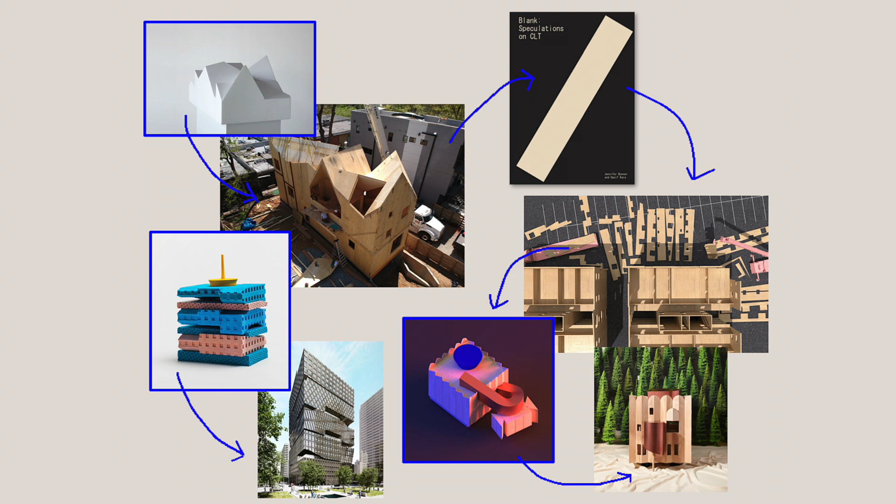I'm going to speak about mass timber construction, including Haus Gables, a single-family residence in Atlanta, Georgia, from 2018. I'll introduce the Blank Book. I'll also show pitches to developers for a multifamily housing project, a small lot urbanism project, and a spec office tower, and I'm going to end with the Blank House. But all of this is also just really about candy, sandwiches, and hats.

Before I get to that work, I want to introduce the work of Mall through a series of images. I'm often interested in starting architecture with a question rather than a sketch.

Here we are flying four drones around Haus Lange and Haus Esters to scan Mies van der Rohe's use of brick in these large picture windows, located in Krefeld, Germany. We had two drones flying around scanning the rear back facades, in synchronization—these are kind of two twin-like houses. But two drones weren't enough, and we needed four in order to film the two drones doing the synchronization.

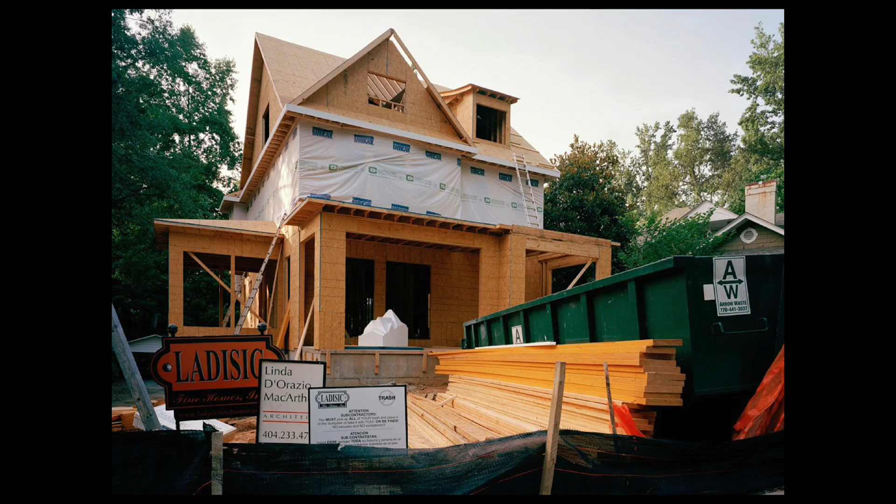So performance is very much a part of the mall recipe. We often look to things outside the discipline of architecture, found in pop culture, like sandwiches, picnics, candy, candy shops, and dollhouses. I'm interested in the ordinary, like astroturf and stucco, and the everyday, like wedding photography or everyday construction techniques, and how all this material can become the starting point for the architectural project.

Mall is also interested in the project of representation, which I would argue is the only realm for the architect until she builds. It's the driving influence in all the work, and so for me, a representational project is the architectural project.

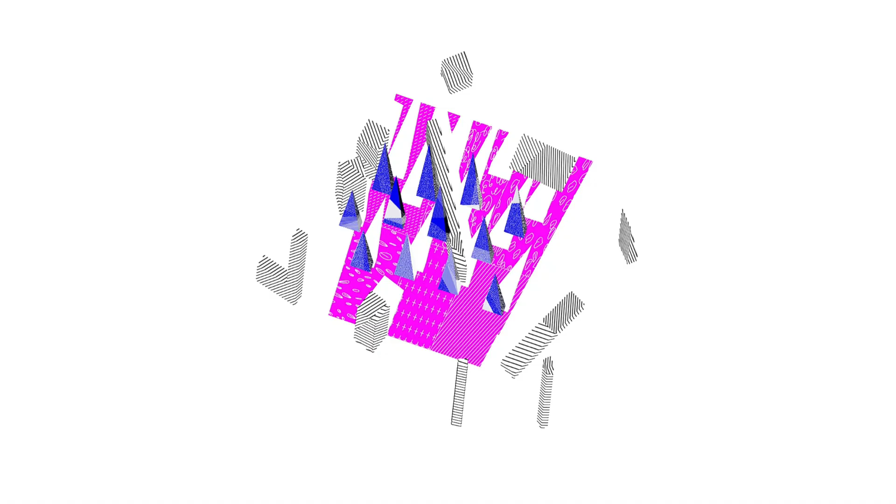This is a project called Another Axon that snaps into view and looks like an axonometric drawing. But it can only be seen within the city from the top floor of a Hard Rock Cafe parking deck in Boston, located on the Rose Kennedy Greenway.

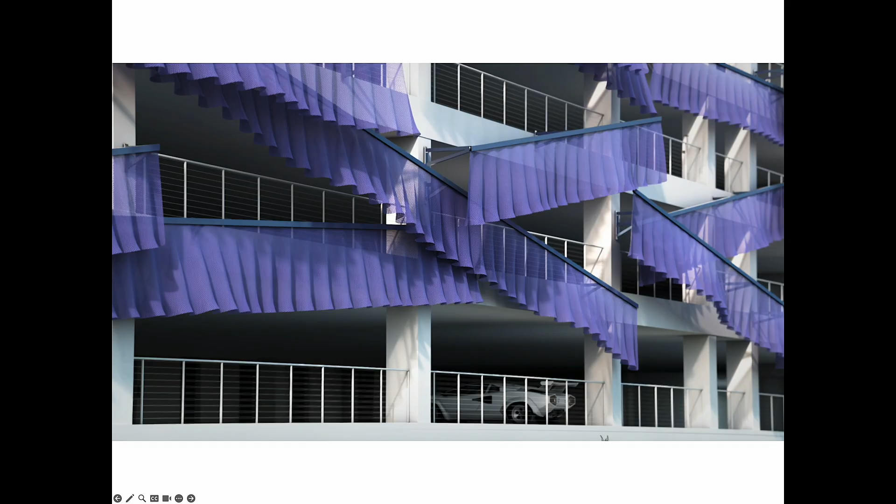So we have an affinity for fake, artificial materials, and the kinds of materials that look like one thing but are meant to represent another thing.

There's also an intentional link to art practice and the works of contemporary artists such as Barbara Kasten. Kasten's use of colored gel photography inspired a project titled Still Life, which became the driving force for an exhibition and publication at Harvard Graduate School of Design.

In my first year of teaching, I was tasked with being a faculty editor of a 400-page book, which ultimately became a demonstration project back to the school, asking students and faculty how they might start to use more color in their work.

Other artists like Mary Corse's white light paintings, where she painted with highway reflective glass beads for works inside the gallery—this became the mall's cladding system for a 55-foot-long glowing brick facade in Atlanta.

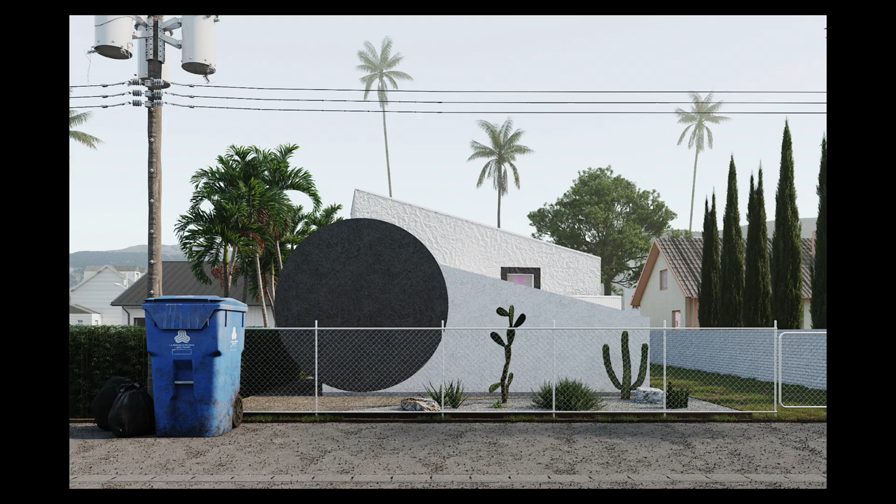The work is admittedly graphic, and it uses techniques of redaction similar to John Baldessari's big circle dot, seen here, in two accessory dwelling units for the City of Los Angeles' standard plan program.

So Lean-to ADU and Big Circle ADU reference all-American lean-to sheds, while also reinterpreting two Los Angeles architectural mainstays: the stucco box and the exaggerated false front.

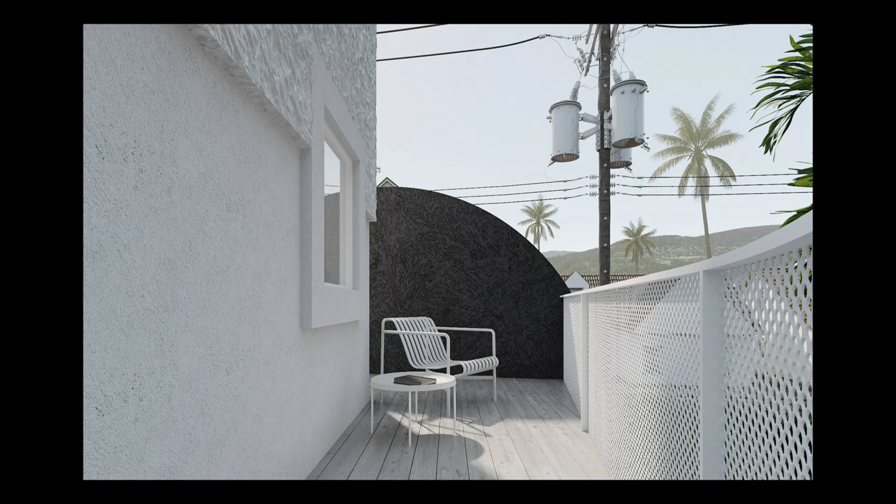We draw from bungalows, constantly mixing the low and high, such as the white house, black trim trend that we see in pop culture.

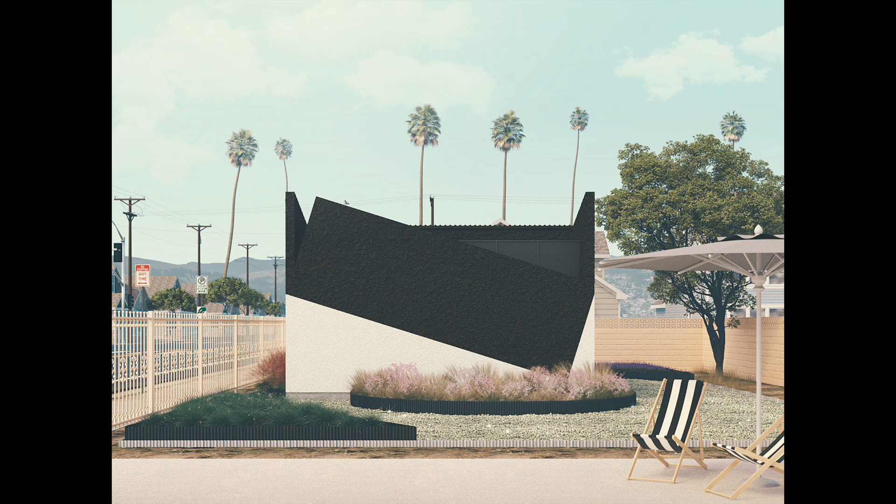There are two distinct ways that color appears in my work. First, through the use of color blocking, so materials of color kind of block inside of space. Second, through color gradients, so equal doses of pink and blue syrupy colors.

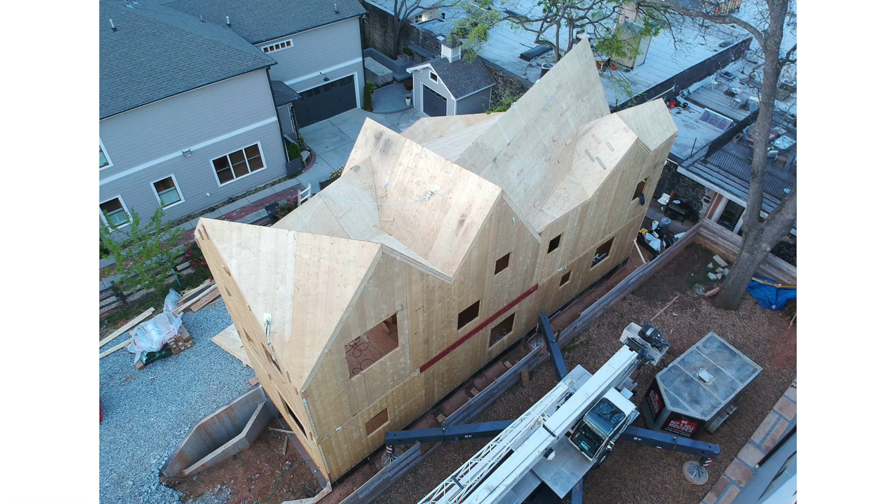Lastly, I'm drawn to innovative material systems like cross-laminated timber and its potential to reset the discipline of architecture. I'm going to demonstrate how CLT and its capacity for structural gymnastics can have implications on the aesthetic for domestic and public interiors.

The first project, Best Sandwiches, looks at something like a sub-sandwich, and the obsession in pop culture where everyone's vying for the best sandwich. We know this is kind of an American phenomenon. I'm interested in all three versions: the real Dagwood sandwich from a Google search, Claes Oldenburg's giant BLT soft sculpture made of vinyl, and our very own BLT at the mall.

I'm interested in figuring out a project between all three of these spaces. The project questions the extruded floor plate in architecture and looks to stacking strategies that sandwiches offer the discipline. It takes a certain amount of sandwich know-how to make an architectural stack. You can see bread, cheese, lettuce, tomato. This is a BLT.

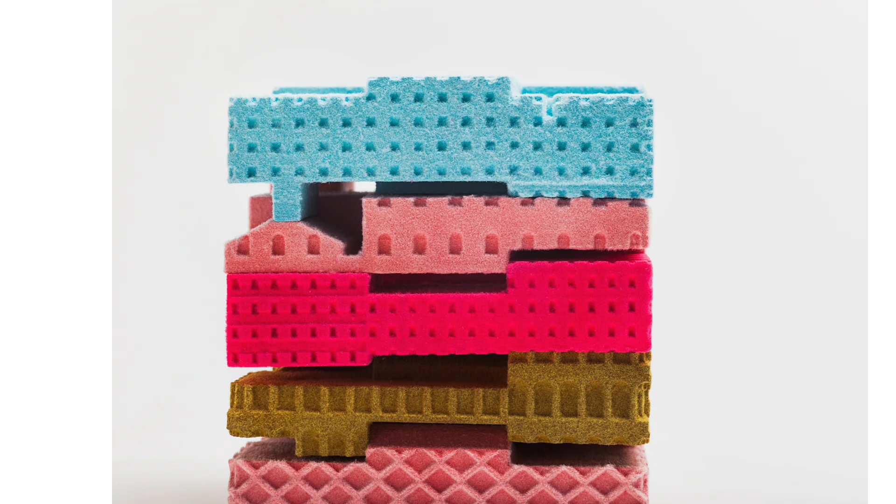Color and glitter are also important when making a stack. All the different layers of the stack offer different combinations of apertures, and this is all intentional. The stack offers us multiple grounds and, as a result, multiple elevations.

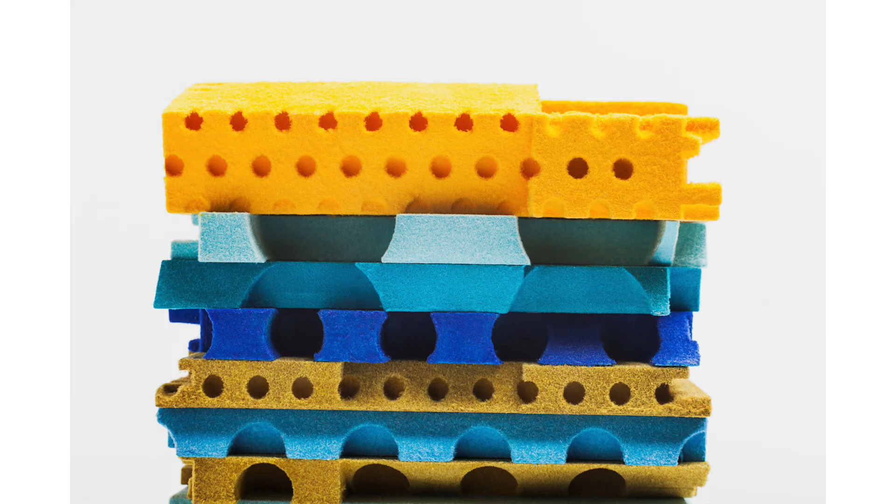After doing this kind of work with models and drawings, the idea is to take the conceptual or massing model and turn it into a real building. The following year—this is pre-COVID—there was an idea to turn Best Sandwiches into a speculative office tower called Office Stack.

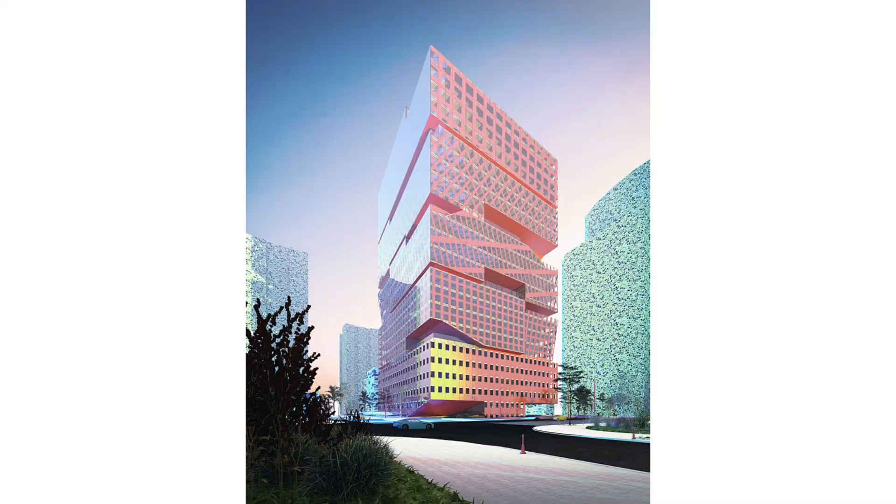This is a project that won a PA award several years ago. It's a mid-rise tower, and no longer will KPMG be the main tenant of towers moving forward—there's a possibility that multiple tenants would happen within a sandwich stack, each having their own identity and chunk within the space. They're connected together through mini atria and have their own circulation systems.

If there are any developers in the room—I don't know if any were able to make it out tonight—you know, I like pink, it's very clear, but I can also do gray if that's what y'all need. I just wanted to give the example. But pink looks better, right?

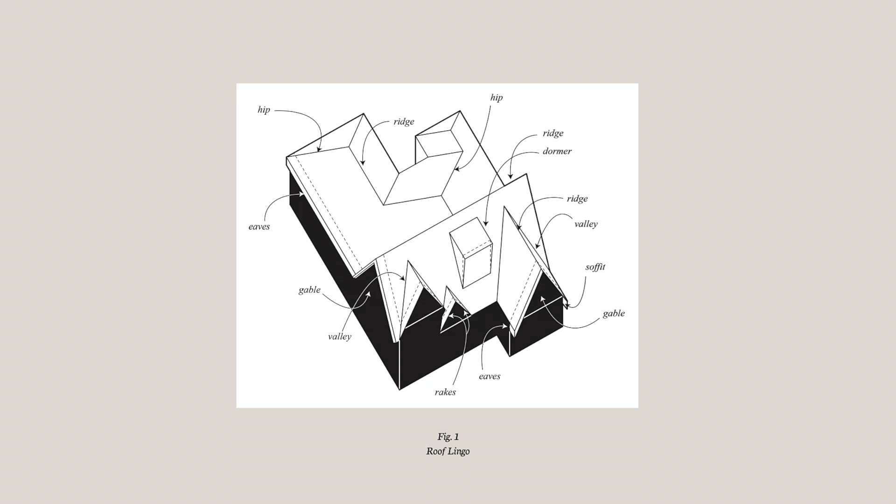The next project is Domestic Hats, which is an obsession around studying everything to do with the roof: hips, ridges, dormers, valleys, soffits, gables, and not being concerned with anything else in architecture. These are the roof typologies available to us.

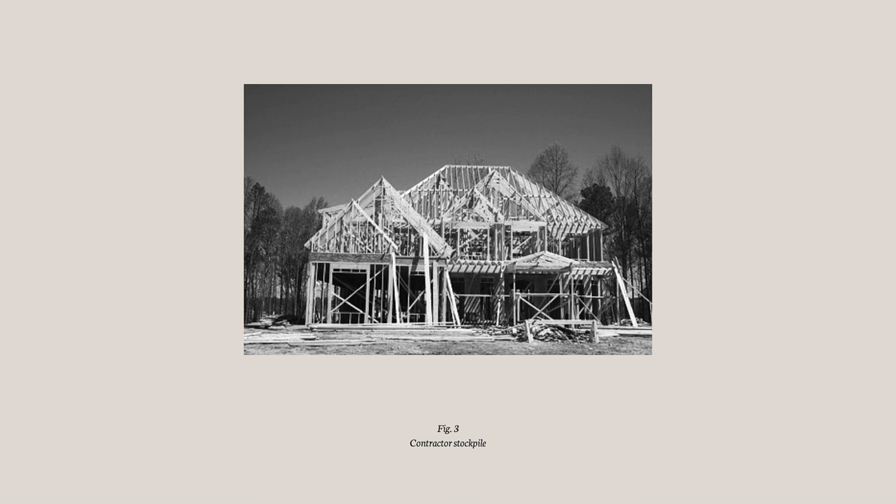In this body of work, I was interested in the contractor canon—what we're seeing made across the US in suburbia or spec homes. I'd go as far as to say the single family house and its roof structure might be equivalent to the European cathedral. There's a lot of angles, a lot of know-how, a lot of knowledge, and a lot of geometry and expression, which is fascinating from that perspective.

Studying all the roof pitches, most roof pitches are under 12 to 12, but everything actually implemented in Haus Gables is above 12 to 12—things like 14 to 12, 17 to 12, 19 to 12. So there's an exaggeration of the roof pitch that I'm proposing.

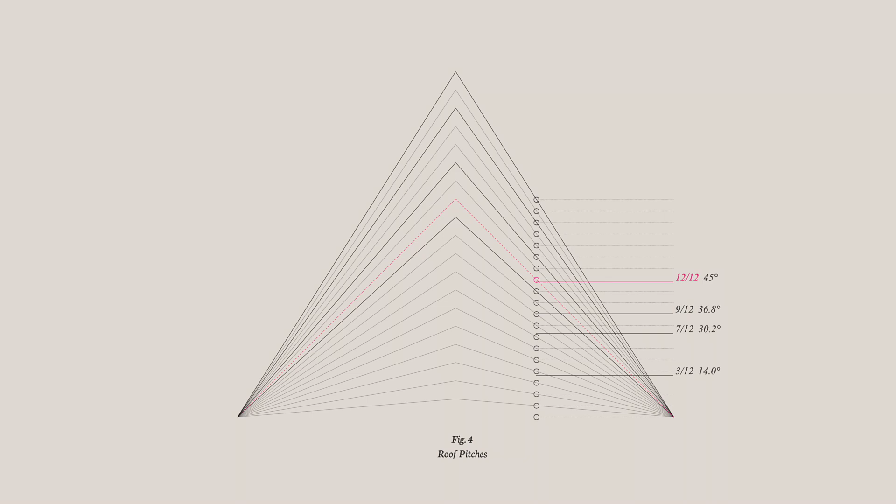I also looked at how we usually build these houses. They have a lot of expression, but we're usually building them with a vented roof system, so you walk into the homes and they have flat ceilings all covered in drywall. The proposal here is that we make more spaces using unvented roof systems.

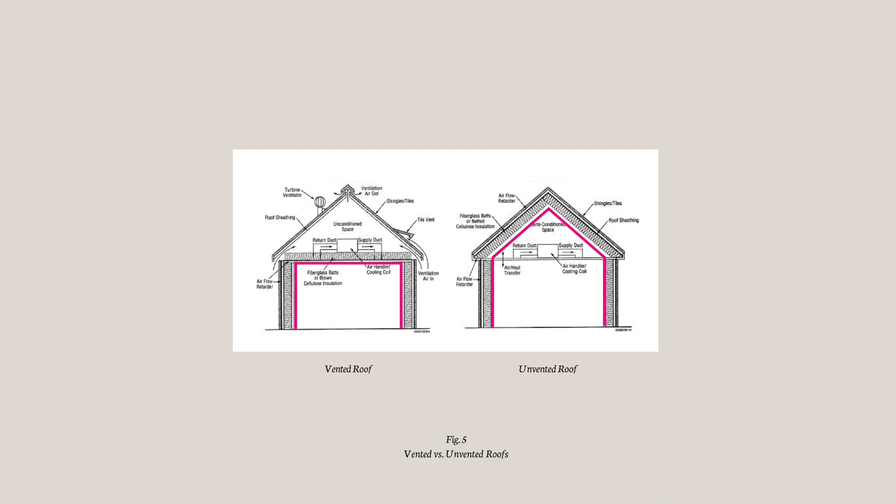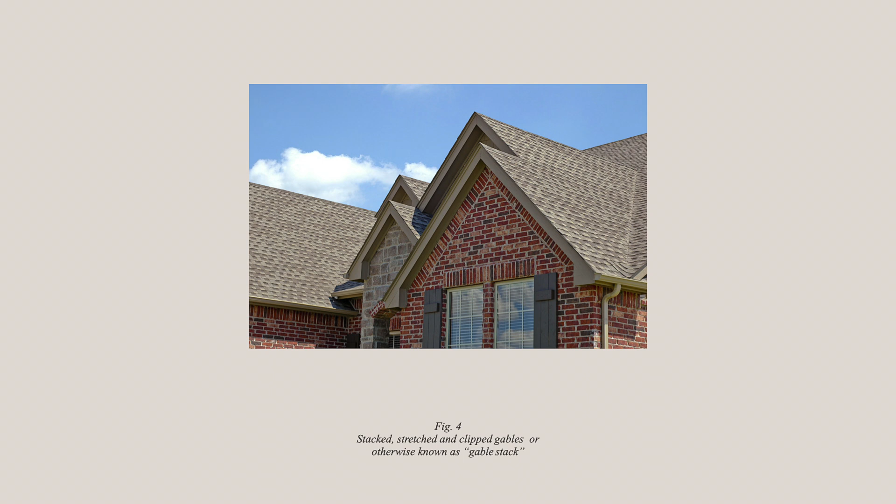In figure 3, there's a chamfered triple hip with asymmetrically extruded gables. In figure 4, there's stacked, stretched, and clipped gables, otherwise known as the gable stack. And figure 5, we have a front-facing gable with a camel-backed hip, plus a rotated gable bump, and it's in the back.

So you have to really get into and obsess over this, and you can make up any names you want, call them whatever you want, and it's a lot of fun.

So we sat down with my research assistants at Georgia Tech, and we took a survey of 50 houses in the Atlanta area in Georgia, cutting across 8 different neighborhoods. We were looking at houses in Buckhead, object number 21, an affluent part of town, where there might be 10 roof forms that make up one villa. Then somewhere like Cabbagetown, object number 41, there's a simple shotgun house with one hip and a gable roof. I'm interested in the socioeconomic spread and also the geometrical difference between these 50 houses.

And so I was called by the AIA Young Architects Forum, and they said, you've just won an award as the emerging architect. They said, you're going to get a solo show at the Goat Farm, which is an art center in Atlanta. And I was like, well, great, but I don't have any work.

So the idea was to take this project and, rather than study the architecture in these small models, blow up the massing model at the scale that would actually be inflated to fit inside of this gallery space. Sometimes you work backwards: what's the space, and then what can I make to fill the interior?

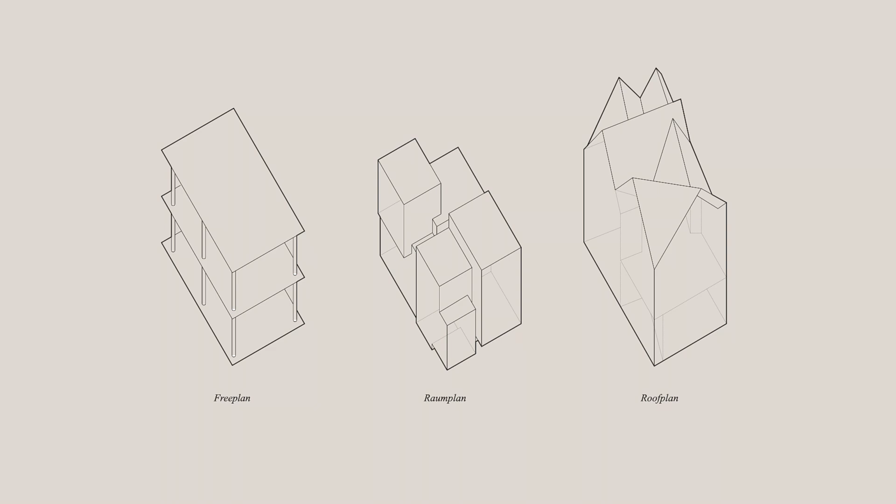The idea here is that these are the kind of diagrams and spatial paradigms that we know as architects, the free plan, the Raumplan. And I'm basically suggesting a new plan, which would be called the roof plan, where the roof geometry is actually imposing logic onto the spatiality of a project. So get rid of the old diagrams and start working on something else, and that's available for everyone to use.

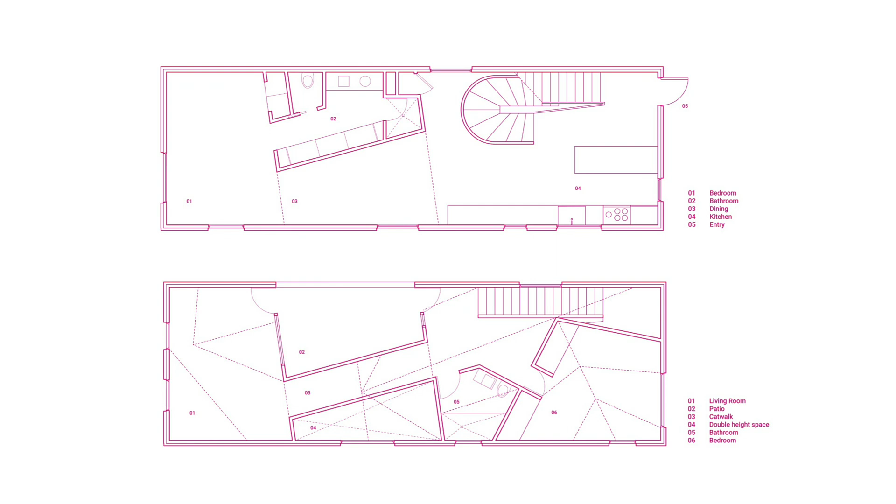These are the 2 plans for Haus Gables. The first floor plan looks like it has nothing to do with the roof, but the second floor plan has all the roof geometry and the ridges drawn on. Sometimes they hit the corners of rooms, sometimes they set up the directionality, like the catwalk there at number 3.

That's basically being hung off of the other CLT panels. This is the moment that the structure is performing and the larger roofscape is acting as a folded plate. Then all the forces are coming down that guardrail down to the first floor, where there's a traditionally framed floor and a steel beam. So this sets up both the pictorial version of the architecture that I want to make and the structural concept that's married to it.

I think the promise of the roof plan as a thesis is that if we start to build smaller footprints in these kind of in-town urban neighborhoods, then we need more volumetric space. So smaller footprint, more volumetric space, like cut-throughs to the catwalk and the living room down to the kitchen.

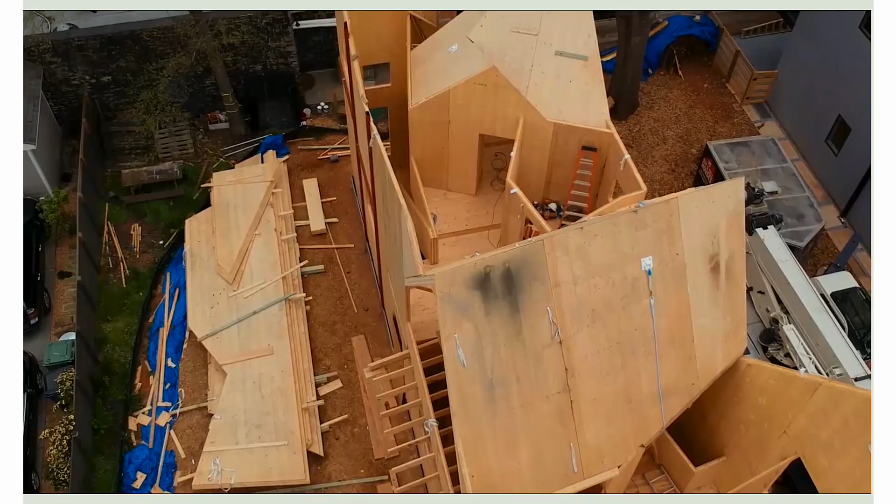So Terry Ducott is the installer here. Do you see him on the roof, that long piece? He's also with us here tonight. So this is really special for me to be able to be really proud of the team that helped install this project.

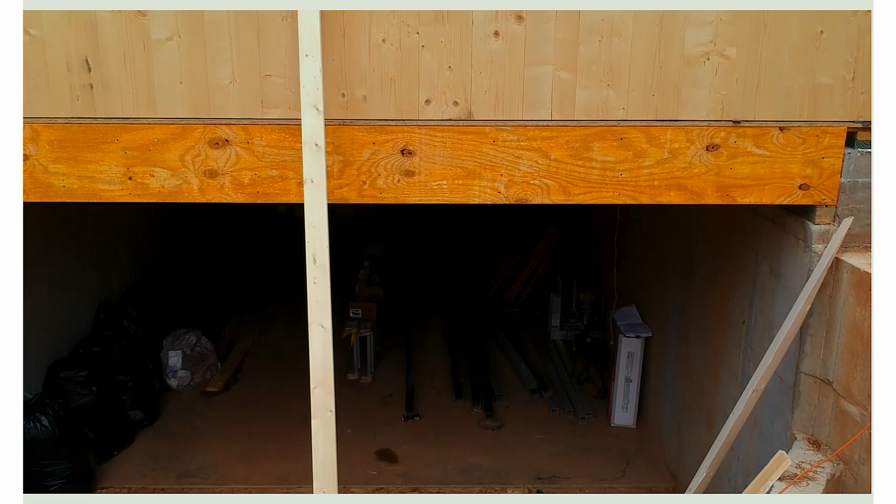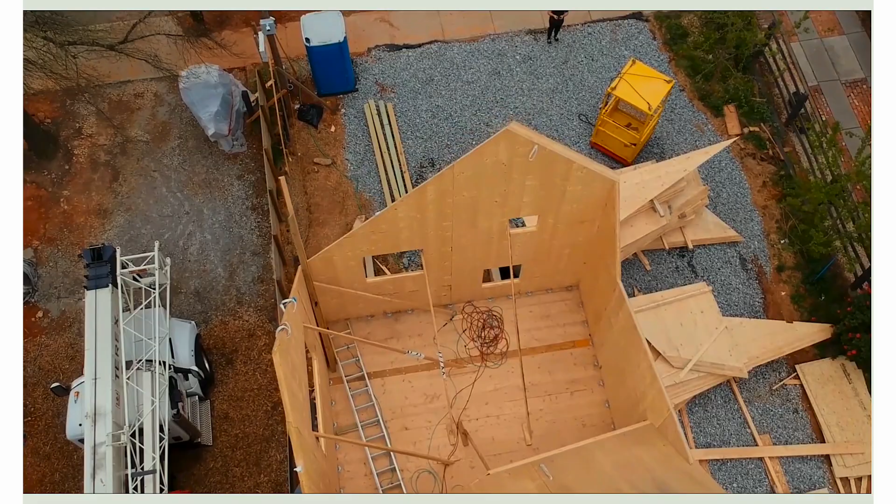The walls are made of 3-ply CLT. The floor is made out of 7-ply, and the roof is 5-ply, and all this is sitting on top of a traditionally framed concrete box. Terry and 3 others with a crane operator installed the whole project in 14 days. There were 87 different unique panels that were cut, and I'm extremely thankful for the opportunity to work together and get this done.

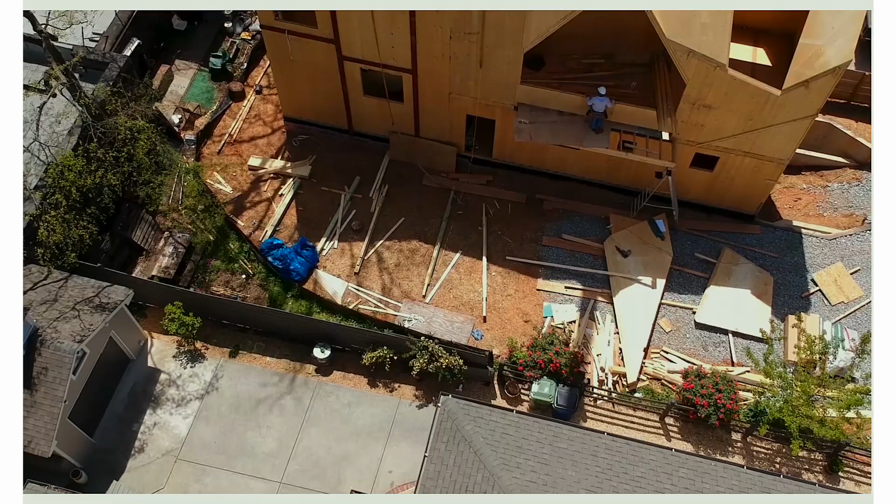The product came from Austria, KLH. I showed you the width of the lot, so I'm using both neighbors' lots, one to lay down the material and one to park the crane.

So here's Terry and his crew, and I'm extremely thankful. Really, the world works on a series of relationships. As a young architect, working with an engineer out of London who had pushed me to look at CLT, I remember a distinct conversation we had, and I said, 'Honey, what's CLT?' I didn't know, this was in 2015. And he was like, 'Okay, Jennifer, this is going to be a steep learning curve, but it's going to make a lot of noise.'

I was then told about Susan Jones's house here in Seattle, the CLT house, and was told that I had to give her a call and get on the phone with her. For me, as a female architect, seeing another female architect deliver one of the most important houses in the country, it gave me a lot of confidence, because this is really risky business, right?

What if one of the 87 panels didn't fit? Or what if many things could go wrong? Terry couldn't really just go to Home Depot and buy another panel, right? So there's a lot of risk involved, and it helps when you have a network of people around you that are cheerleading and supporting and there to pick up the phone when things go wrong. So I'm forever grateful for that, both the formation of the team, advice, and getting to work with fun people.

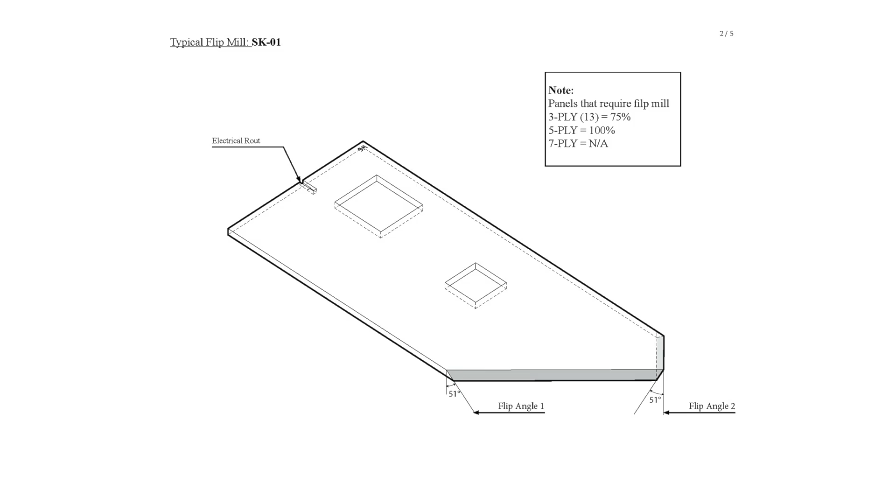At the time, there was no manufacturer that could flip mill these panels and get the kind of precision we needed. So 75% of the 3-ply wall panels were flip milled—that's most of the walls—and 100% of the 5-ply roof panels were flip milled. The geometry involved compound miter cuts made with a CNC machine, down to an 1/8 of an inch tolerance.

This is the virgin product right off the trailer. All these CLT panels arrived on site with precision, but the background story to get us to this place involved talking through several details of how we were going to build this—basic things like which side of the panel faces the interior and exposed surface, where the screws go, and what the joints look like.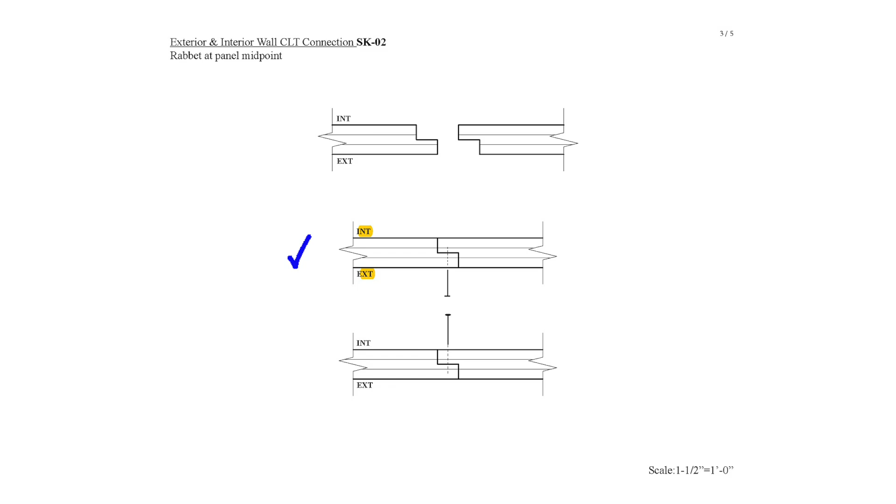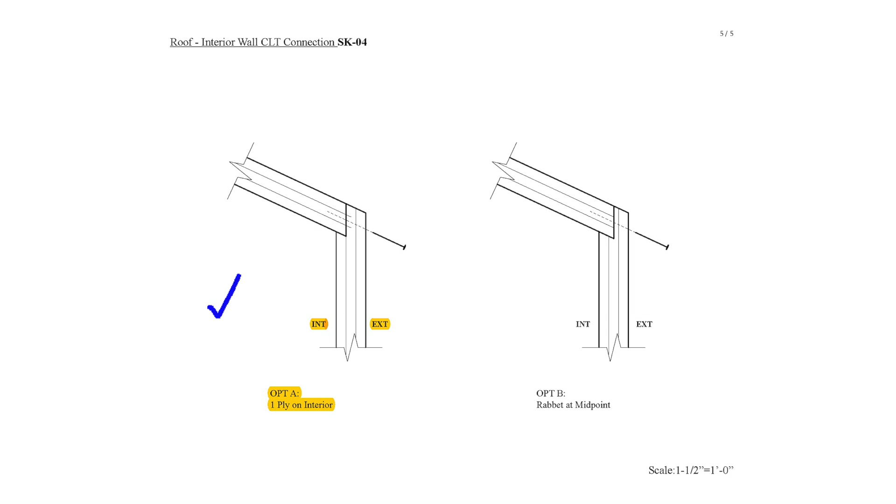At the corner, you can do a rabbet joint or a butt joint. We also had complications with multiple roof connections between wall and roof panels, and how all the screws would either be hidden, exposed, or plugged within the house. We also had to think through the mechanical system—I talked about that traditionally framed floor that sits on top of the garage and the concrete box.

That floor pushes forced air up into the project. On the top floor, we have ductless mini splits pushing air down—there are 3 of them in the upstairs area. The pre-planning for something like this is intense.

We made a diagram of each panel—there are 87 panels, so there are 87 drawings. This was kind of an IKEA cartoon drawing set that we worked through with both Terry, the installer, and our engineering team at Benson Wood.

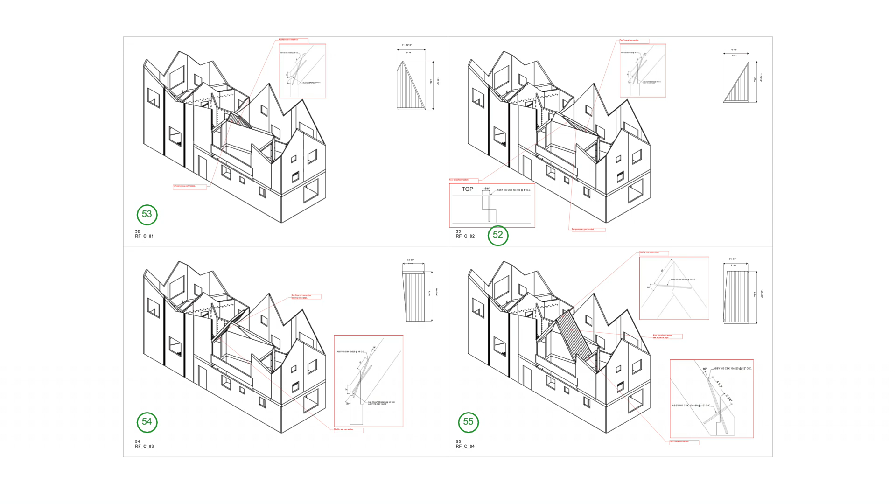We detailed the connection for the drive angle of the screw, how the two panels go together. As we move through these drawings, looking at the roof panels, the details get more and more complicated. On panel number 53 alone, there are 3 drawings that need to be considered.

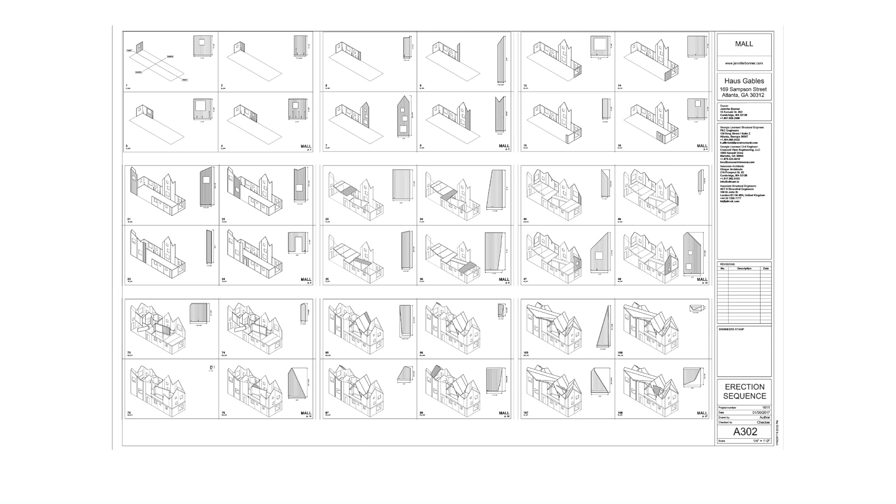That's the prep work on the ground before you hoist the panel into place. This is the kind of erection sequence drawing that we worked on for probably about a month before the panels arrived on site.

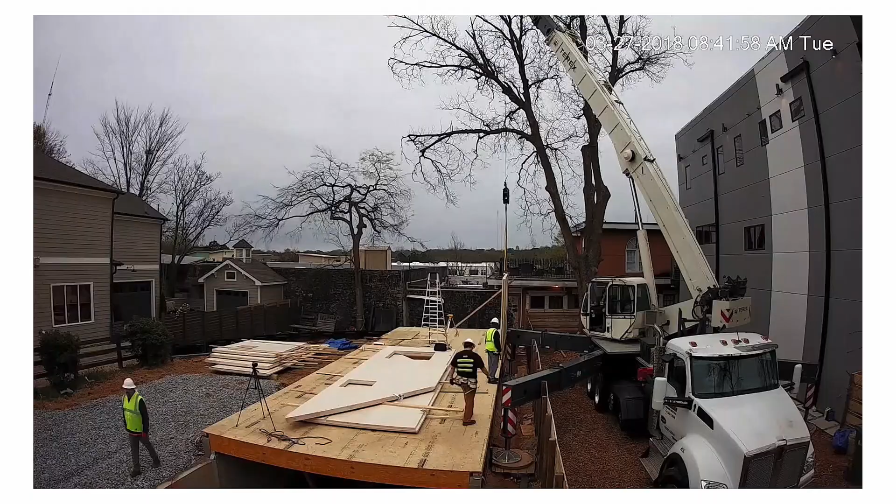What's exciting about CLT is the way that the shop drawings are baked into the manufacturing. So where we're going to pick the panel up—that's all loaded in a particular way.

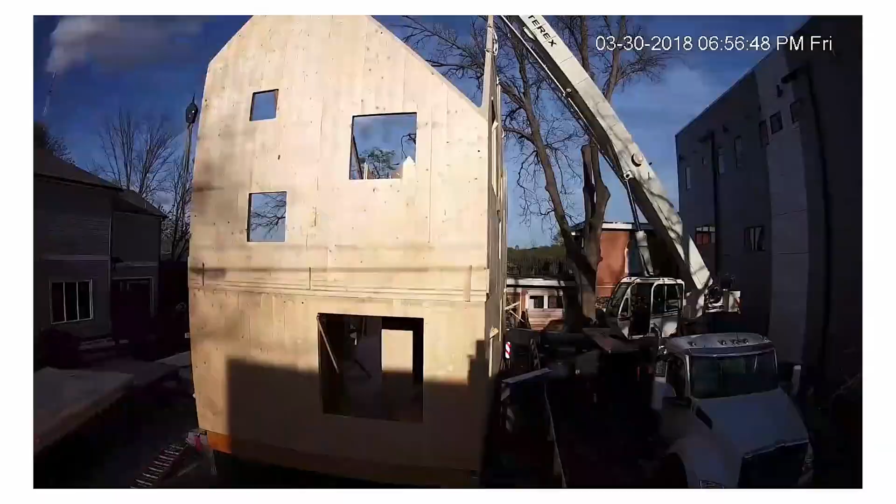The crane is parked on a neighbor's property, and the laydown lot is on the other neighbor's. We had all these panels trucked in from the Port of Savannah—about 11 hotshot trailers that made a spectacle on the street, sometimes blocking it. In this sped up view you can see how fast Terry and his team put everything together.

There were 4 engineers on this project, with a lot of coordination done in advance. On the very first day, this is what the site looked like.

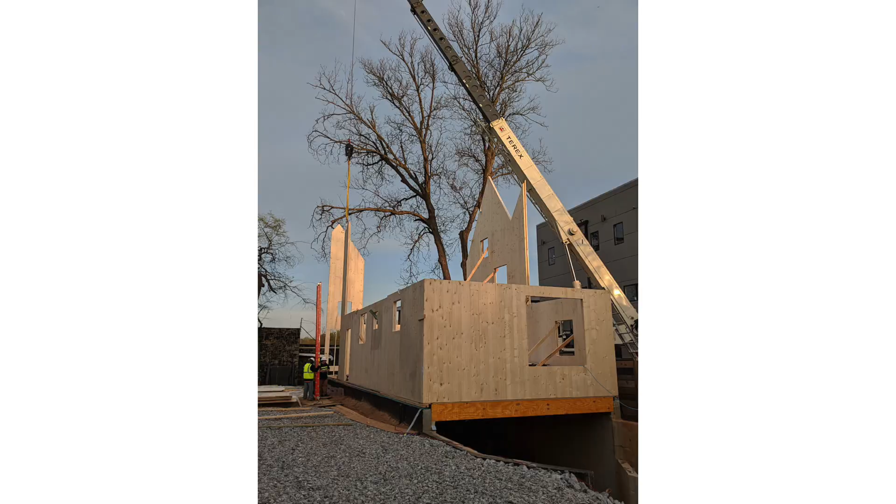It looked to me like half the house was already built, and I thought, how could this go so quick? It was also the moment I looked at the project and it felt like the architectural model—like a foam core or chipboard model laying on our desk.

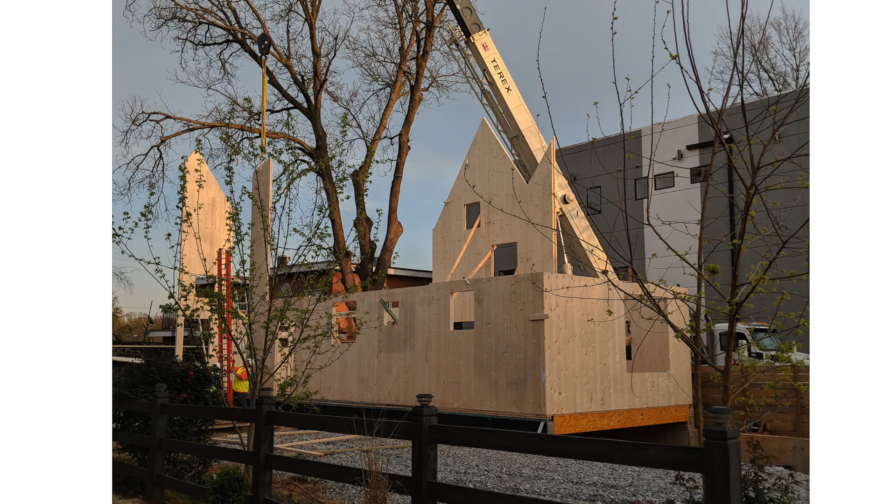For an architect interested in the role of representation in architecture, I think CLT has big possibility and potential for the discipline. It's really heavy, but it looks kind of paper thin and fragile.

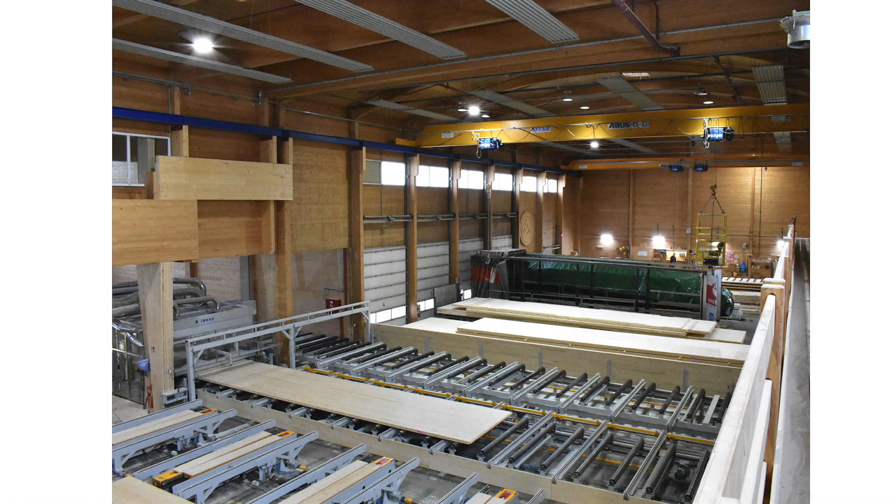This was KLH's factory. Hanif Kara from AKT2 sent over engineers from London to inspect the panels before they were shipped, and they took these photos and sent them back to me. I want to remind you of this image when we get to the blank book later.

I'm looking at this really big panel on the factory line here. Remember, in Haus Gables, we're cutting them all up into smaller pieces—but this was an influential picture to me. Here's the shipping containers that they sent over to the Port of Savannah from Austria.

Architects usually don't get involved in logistics like how to load up the panels in reverse order, but we took KLH's shop drawings and reversed the layering so that when Terry picked the panel off, it would be ready to go on the bottom, with panel 1 at the very top of the stack. It kind of worked out that way, didn't it?

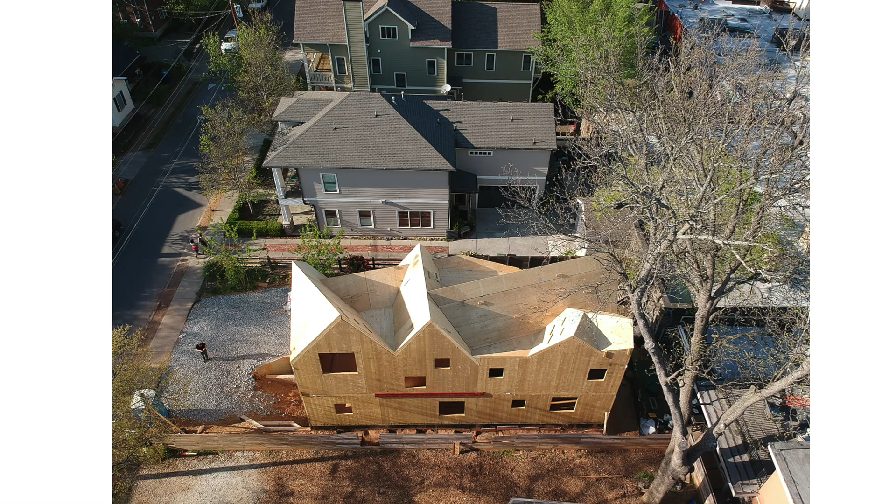When working on the project of the ordinary and all those original roof structures that I showed, we kind of obsessed over and studied. Then when you take the drone up, you see that this roof just two houses down is in perfect alignment with the roof on our project, which kind of makes sense that something like that would happen.

This was my first project built, and it's extremely liberating to walk on the site. All of y'all know that are on construction sites regularly, and for me it was really special to have my daughter there, watching this whole process.

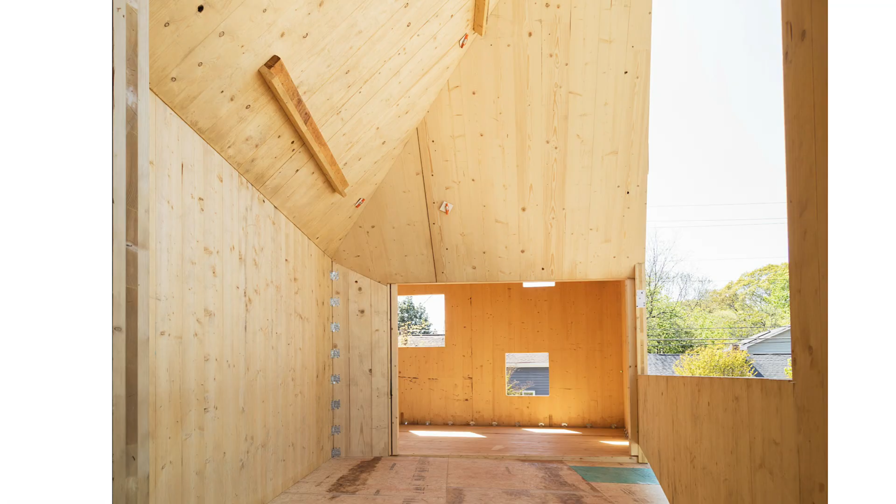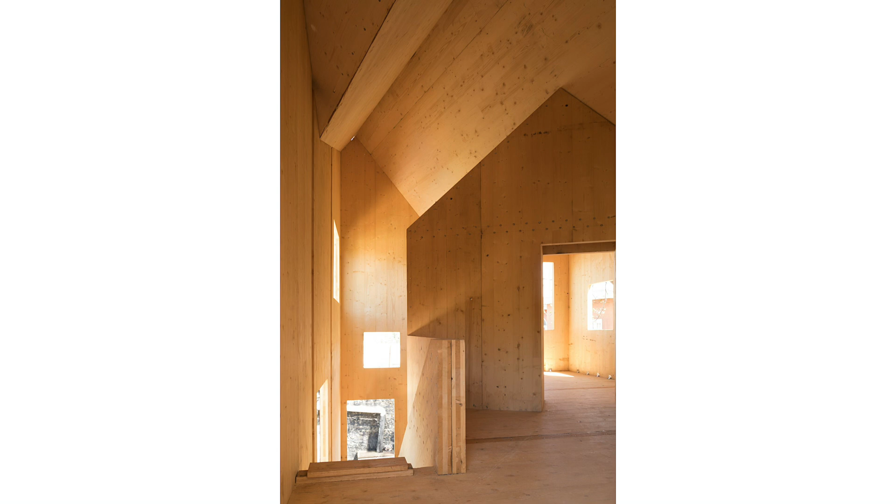We brought in a photographer to photograph the raw CLT, to show where all the brackets are and how the product gets dinged up during the construction process, but also to see the space in its raw setting in a kind of industrialized way just after it's been put together. You can really see how the light works and how the spaces start to be formed.

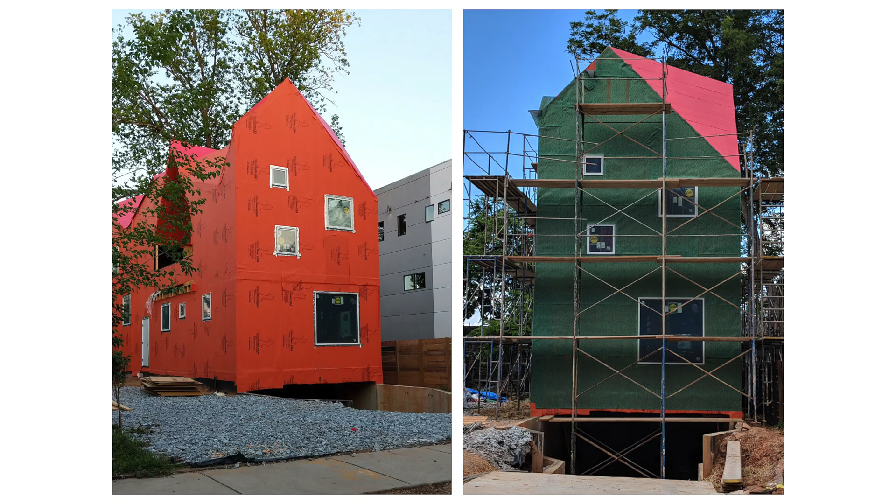There's a lot of layers to the CLT. The wall panel interior is the final finish, and then everything else goes outboard of the CLT panel, like the water barrier, and then a 3-dimensional mesh so that water drains down off the wood and isn't sitting there over time.

We had to put a layer of DensGlass due to being about 6 feet away from the neighbor's house. There was a concern from the city of Atlanta. Otherwise, we got this through the city of Atlanta very quickly, with total support for building the first CLT house in that part of the country.

To talk about all these plastic materials that Susan was talking about in her introduction, I was interested in the Southern Institute of Faux Finishing. It's located in Brandon, Mississippi. I don't know if anyone's ever been—I've never been, but I want to go sometime soon. I'm interested in how Southerners think about materiality.

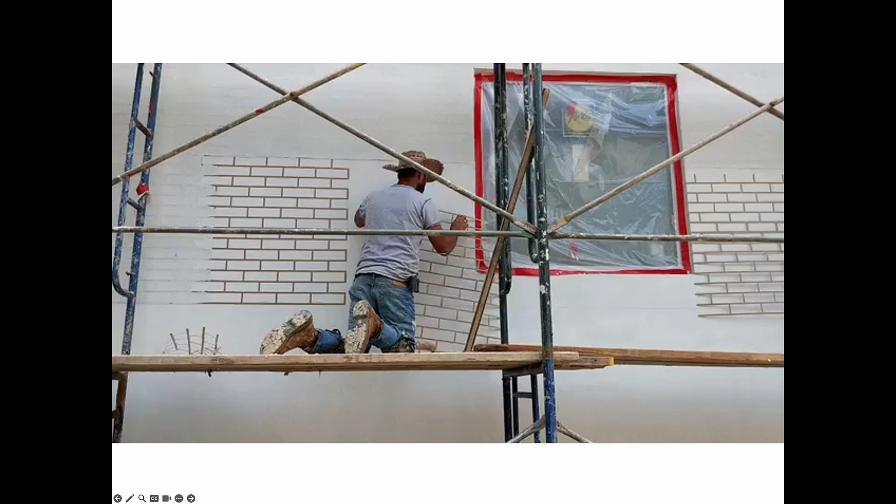As I started to call subcontractors in the Atlanta area, I was telling them about this fake brick process I wanted to make, and they said, oh, we've already installed that on an Arby's around the corner. So I don't know why I was spending all that time at Harvard trying to research a way to make new materials, but it's a product—it's like a sticker, you stick it on, the last layer of stucco is troweled on, and then you peel it off, and that gives you about an 1/8 inch of a reveal, so you can have fake bricks on your stucco.

But what Arby's does not have, that Haus Gables has, is a dash finish of these glass beads at the very end, so it's kind of reflective and sparkly.

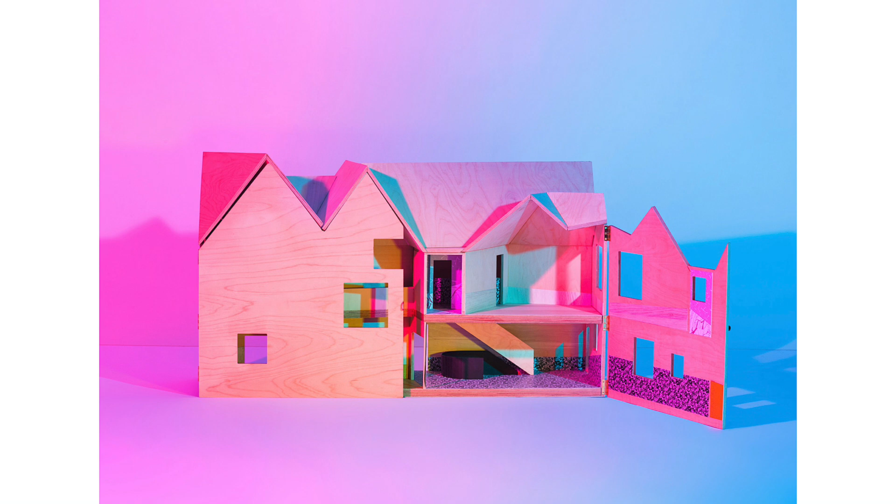This notion of these faux finishes was tested out on a 1-to-12 scale dollhouse. Each room had different faux finishes attached to them, with their own logic per room. And here they are as a set of products that you can purchase and buy. So I'm speccing what I was considering faux finishes - you either made the cut or it didn't.

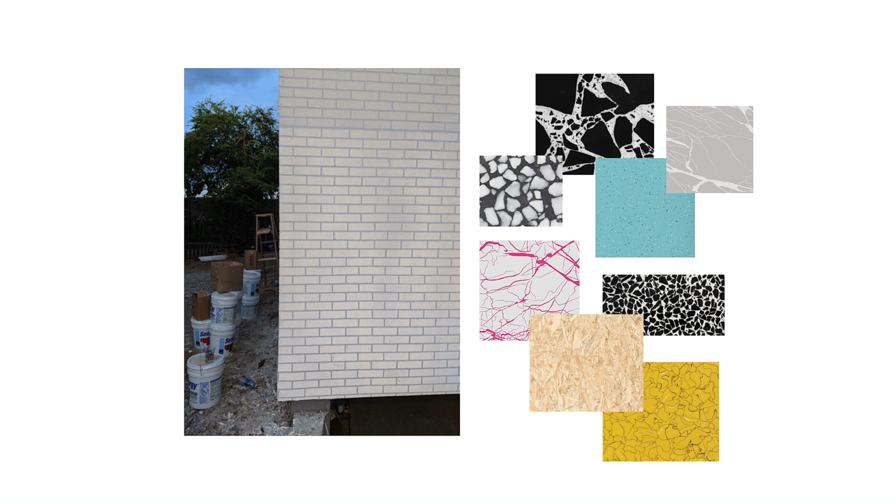So it's things like yellow vinyl that's typically used in hospitals. There would be terrazzo, but not terrazzo that's made on site and poured in place, just a thin tile set. And then things like this one, which is like somebody in Spain had gotten really cute and funny and had made OSB board into a ceramic tile.

And then the faux finishes also are functional. So they become the backsplash at the kitchen countertop, and then kind of dive down to maybe 2 feet off the ground on the other side of the room. And behind there, we've routed in the electrical runs, and the faux finishes are kind of acting as stickers to cover up that electrical.

The photographs are by the interiors, by Naro, a female duo out of London. And Marcella, who took these photographs, used to work as an architect with Zaha Hadid. It's very interesting that the way she sees the world through her angles and views was very similarly mapped onto her previous work with Zaha. So I don't think another photographer could have gotten these kinds of moments within the house.

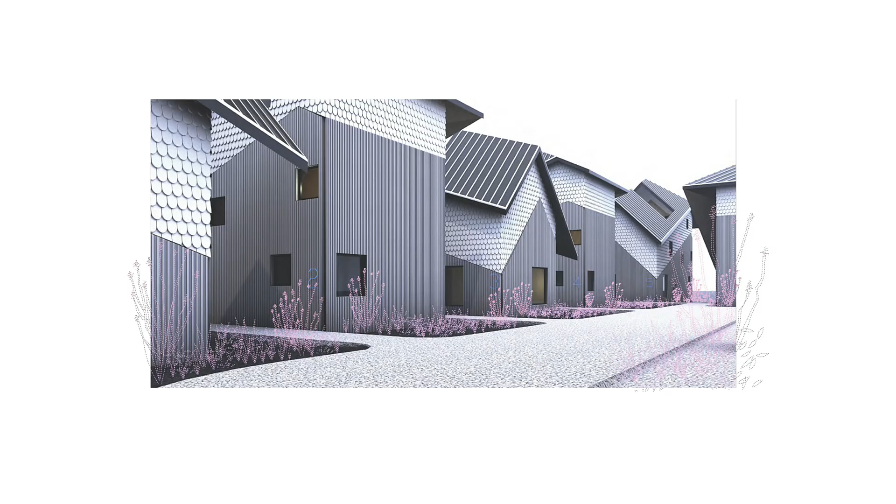Okay, so after Haus Gables, I went on a bit of a tour and gave a lot of lectures. And every time, someone at the end of the talk would ask me about cost. So basically everybody's trying to figure out, can this be the next model? And I don't know, but what I did know is that if they maybe started to multiply, or there would be more than one, could we get the pro forma to work out?

So I made a project called X houses, 10 houses, and it's really looking at small lot urbanism. This would be modeled off of someone's project like Jonathan Tate out of New Orleans, or Barbara Bestor's Blackbirds in Los Angeles. So this incentive that we all don't need garages - we could park in this parking pavilion that you see as the largest structure, and walk very closely to your front door.

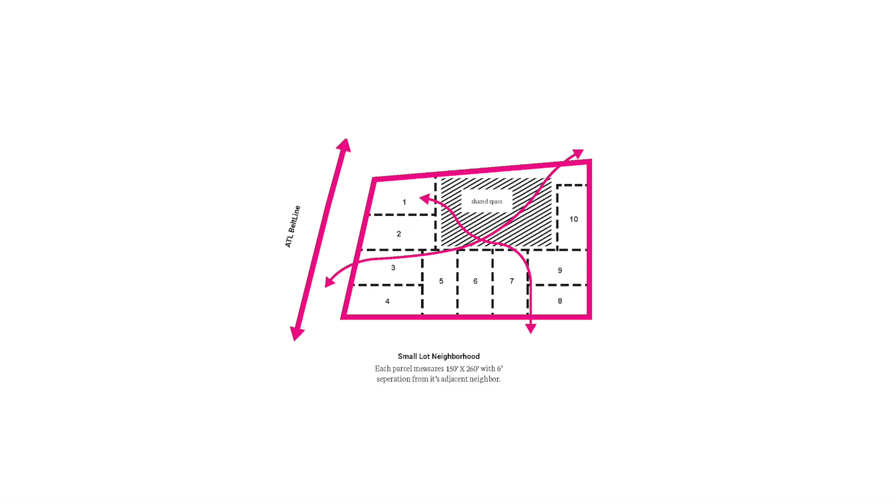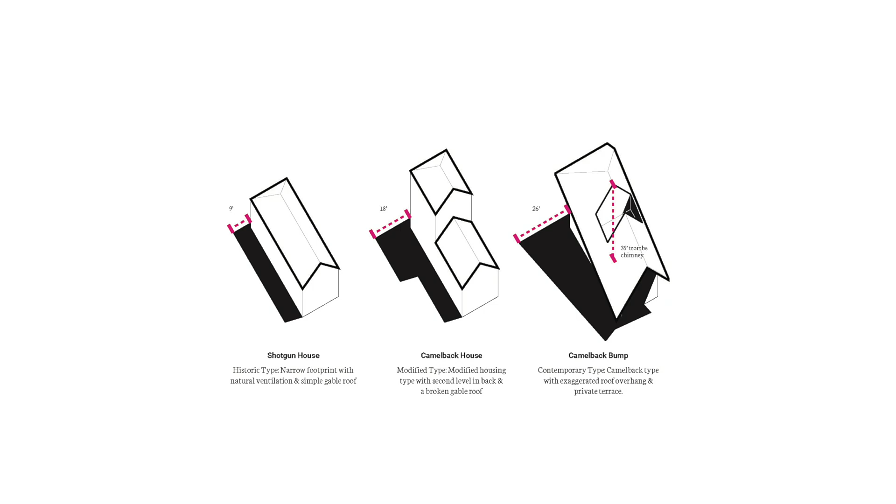And so this is how this would work. So these are all single family homes, but in a very compressed, tightened urban lot. And the idea that the big roof is like the element of the house, but it's also the element of the community - looking at the traditional shotgun house in New Orleans and the camelback house, and then how to not make a discontinuous camelback, but how to make it continuous.

And the idea here is that it would also be made out of the CLT panels, and that it would be a copy-paste - so this is the same exact house. KLH or any manufacturing company could cut the same house 10 times with the same files. But it's the way in which we've arranged it on site and mirrored it and rotated it to create this kind of urbanism amongst each other.

And then, this next portion, I'm going to talk about the book. So remember that image that I showed in the KLH factory in Austria? Basically, this is a 50-foot long panel by 9-foot panel.

As you all know, this is based on shipping containers and truck transportation. But I started to think about it differently after I saw it being dangled from the crane in the air and slid into place. And I was thinking about how 4x8 plywood sheets have a certain scale to them. They're at Home Depot, and there's an industrialized way of looking at it.

And so because I cut them all up in Haus Gables, the basis of a studio with Hanif Kara, the structural engineer at Harvard, was to ask students to really think about the blank. Now, most manufacturers don't call them blanks. This is a name that we've thrown down. They call it like a billet sometimes. But the blank has a level of abstraction to it, and it could really get us to start to think about the materiality in mass timber in a different way.

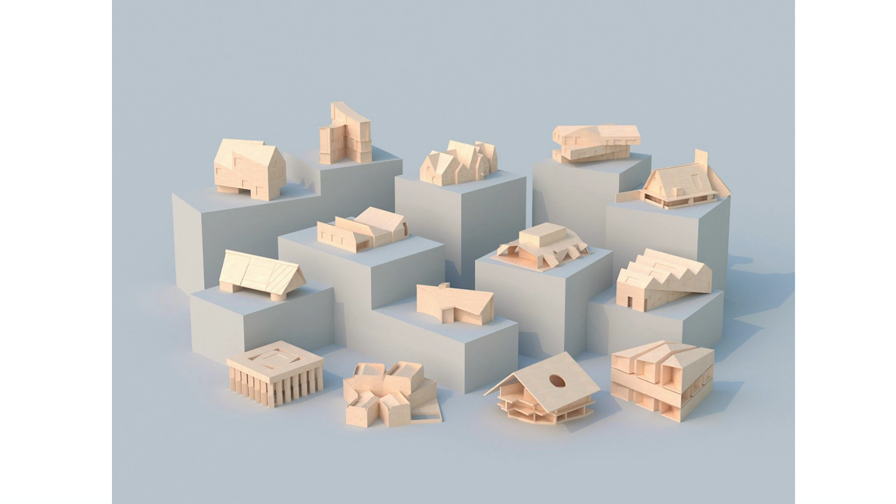So we had 14 students in the studio, and we asked them to design 14 houses and 14 towers. Through pedagogy and our position on mass timber, the project was to say to the students, what do we do with this industrialized object? Do you try to have the blank register in its whole and its entirety in the project? Does it show up in the reading, or do we cut them up and deny the reading of the blank? And so you can see a variety of results from the students.

After that studio, Hanif says, Jennifer, we have to make a book. And that studio happened during the COVID shutdown, so half of the studio was online. Hanif really wanted to do a book during the COVID shutdown in London because he has so much energy. And it was really wonderful to have conversations with the people we asked to participate in the book.

Someone like Nader Tehrani has been using mass timber and plywood his entire career. So he writes an article through the lens of this desire—we all want mono-material architecture at the moment. That seems to be something that's in, but we always work in laminar systems. And so this essay really tries to figure out a new way.

Yasmin Vobis was one of my colleagues at Harvard, and she wants to talk about the representation of CLT and proposes this essay, The 10 Points on CLT Models. And then she herself built this pavilion at the Chicago Biennale that really photographs like a model itself.

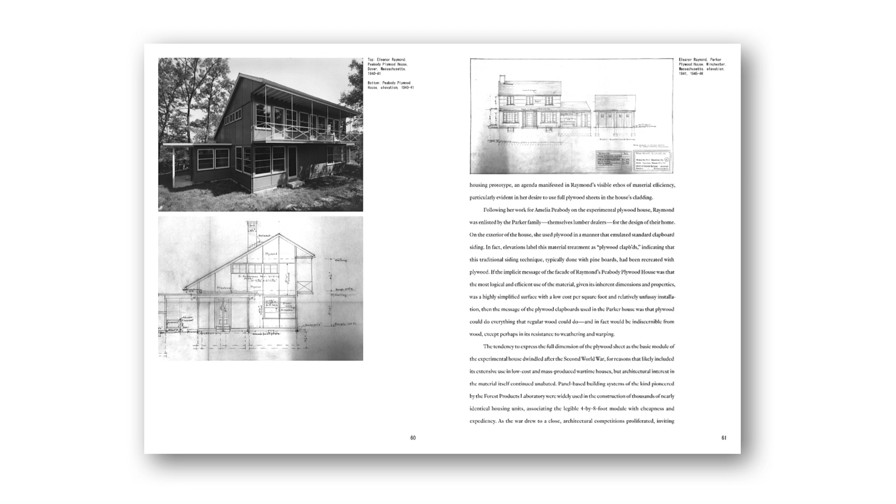One is a traditional client on the right side who wanted the plywood cladding to be ripped down so that it looked like siding boards. This is New England. And then the house on the left, she had a more modern client who was okay with seeing the 4x8 sheet as a whole material unit on the facade system. Again, her work has not been published—it's in the book. It's very exciting to see. But it takes a female historian of plywood to find the female architect in 1940, because otherwise we're just going to keep talking about Gropius.

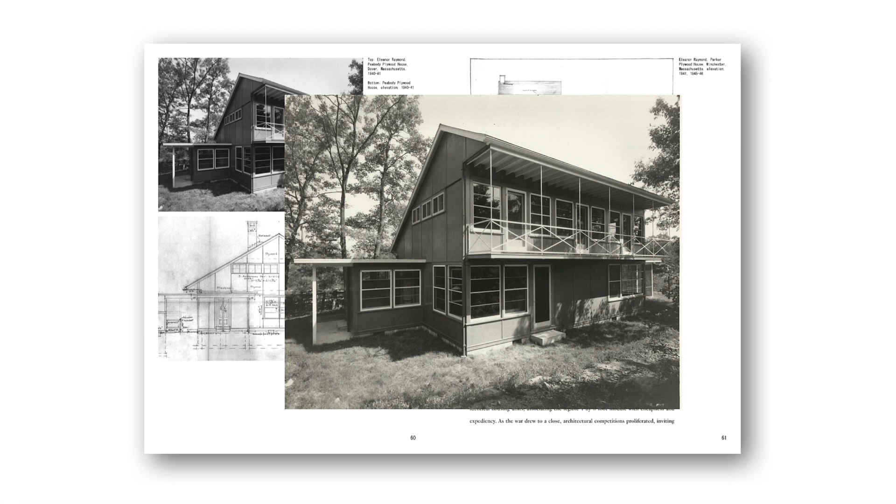We're also very interested in the role that art has to play in the discipline as it relates to blankness or the blank. Lauren Halsey is a Los Angeles-based artist that contributed to the book.

The book was designed by Neil Donnelly out of Brooklyn, and he had to learn what CLT was and how the cross-lamination worked. You can see through his graphic convention that he forced the reader to turn the book ever so often.

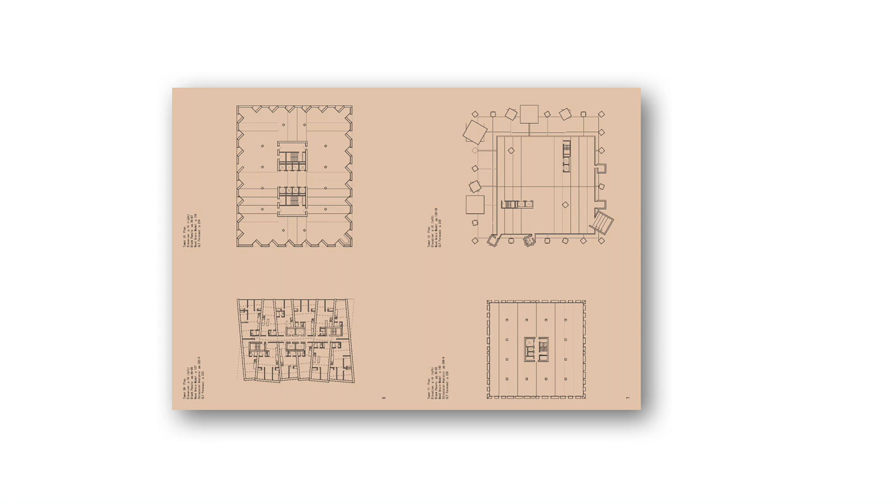This is when we're looking at drawings from the students that we published in between all the essays. The layering of a CLT panel is now also the kind of way and system that you flip and use the book. These drawings are of the students' projects, renderings—panel assembly renderings of towers and houses, and the structural analytics that was looked at by AKT's office.

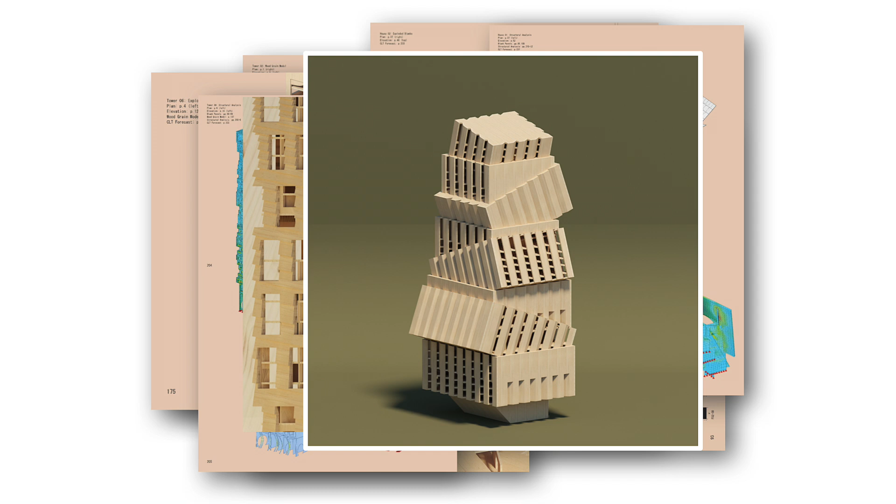This book was co-edited with Hanif Kara, as I mentioned, and at the very end of the book, the students made these projections about the future of CLT that I think are just as exciting as the long-form essays in the book. So that's my book pitch.

Did I do good, Peter?

The next project is called 5/1. This was a project in my office directly after teaching that studio, so you'll see how the pedagogical experiment in the studio then works towards the kind of projects we take on in the summer at Mall.

I think Susan is very much involved in leading Mass Timber in terms of the code, and was sitting on the national team that got this implemented across the country, which would be the Type 4 heavy timber category where CLT and Mass Timber now sit.

So I'm looking at, for this project, all the construction types—type 1, 2, 3, 4, 5. We're focusing on type 5 over type 1, which is the wood frame over a non-combustible concrete or steel building at the base.

The invention of it was in 1990 in Los Angeles by Tim Smith. The legend is he was in Hawaii on vacation, looking at the code book, and puts together these assemblies. Thank you, Tim Smith—now we have this kind of architecture very prevalent in every American city. So if we use my domestic hats logic, what can we learn and study from this, and how can we push it to something else?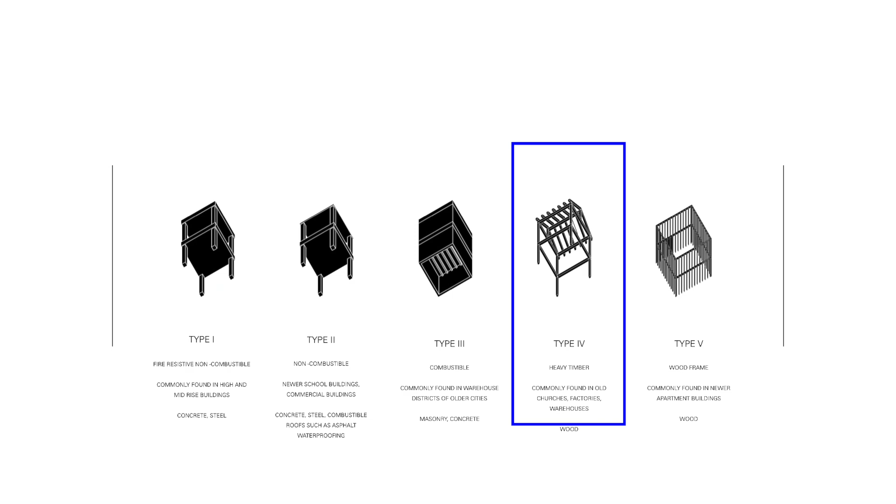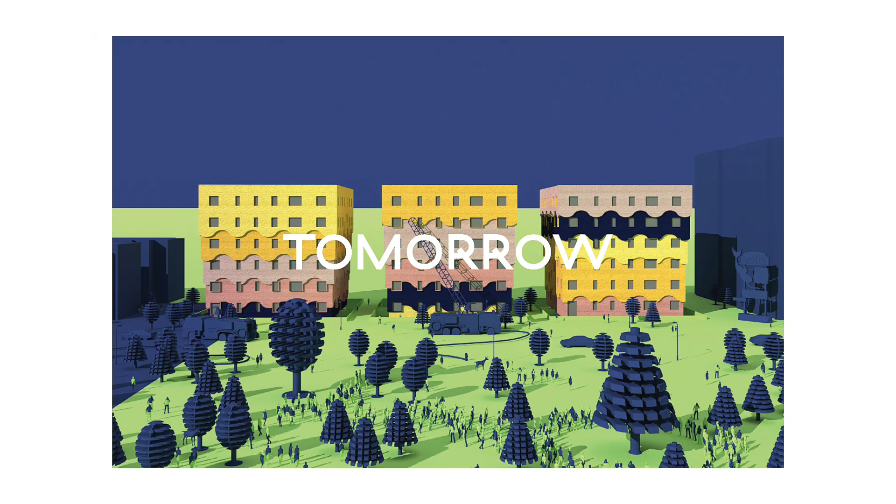So what if we just go straight to type 4 and then put it not over a layer of type 1? This is a developer pitch—they're kind of advertisements, this is Lemonade. These are all using CLT panels for like 6-story buildings.

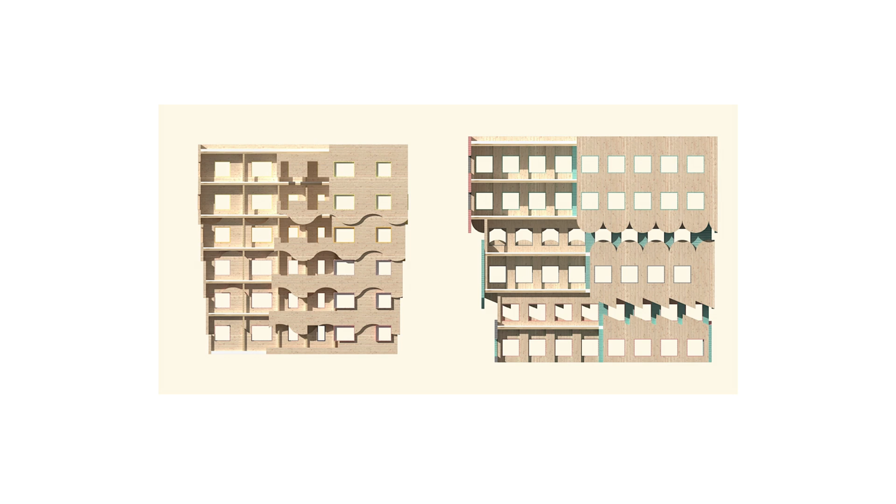We looked at the Portland block as a kind of development area, and different ways we could use the panel to make the exterior walls. Here's like kind of cutaway views. If you're thinking about that 50-foot long, 9-foot wide blank, very quickly, if you put 4 together, you've got a 200-foot long block. I think these things could create urbanism in really unique ways.

We can also cut and draw and make figures out of them. The precedent here is the Kinney Plywood House by Diller and Scofidio, from 1981, where they have the plywood expressed as the 4x8 sheet on the exterior. So I'm saying, can't we use the CLT blank as a registration device for the exterior facade for housing development?

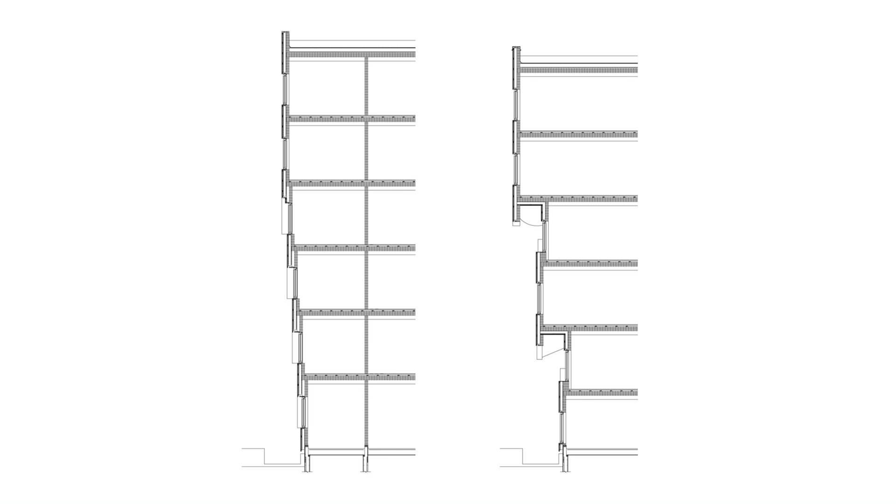Very interested in how these blanks lay out on site, always with a mind to construction, how to get depth into the facade out of these really flat generic panels.

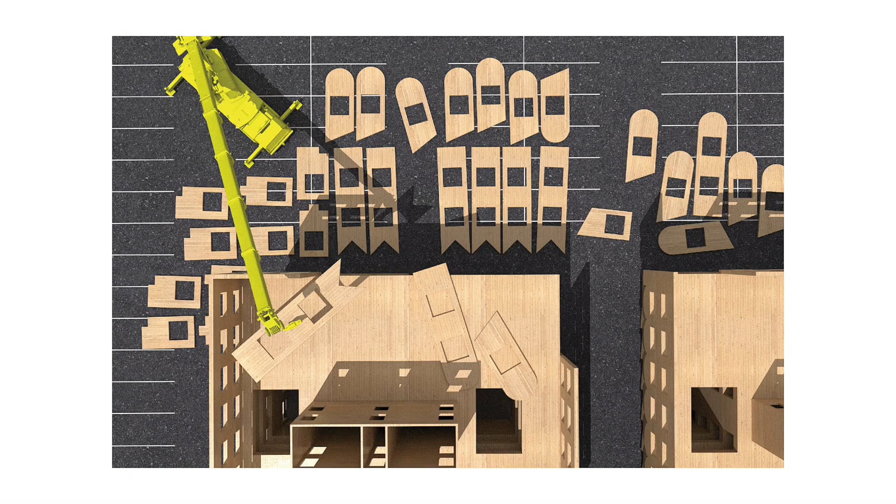Okay, this is the last project. So a few: small lot urbanism, the 4/none which looks at a multifamily product, and then this last project is the Blank House.

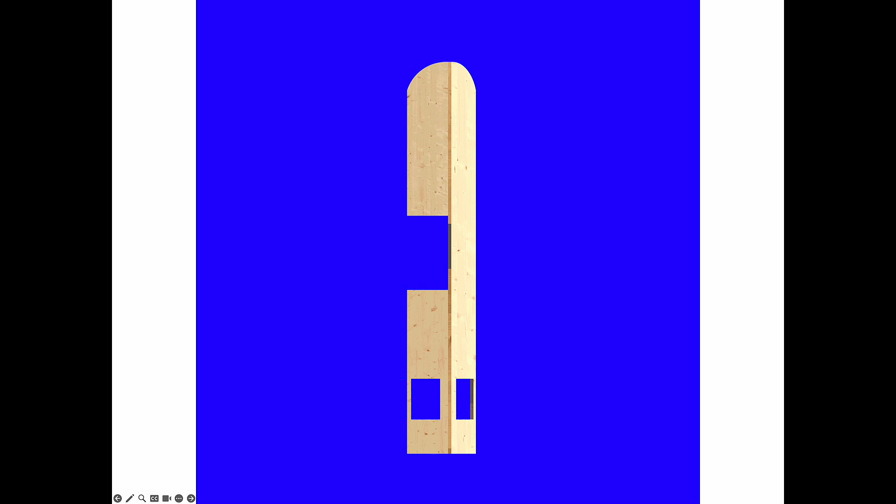There was an idea in Portland to do a Haus Gables part 2, but I thought: no, the Haus Gables diagram has already been built, and now there's another diagram that needs to be built after this kind of blank logic. In this case there's no gables, just a flat roof, and the blank is about 7 feet 4 inches wide, up to about 30 feet tall.

And here's where the candy comes in. Looking at the massing studies—Matt, these are your renderings—candy canes, lollipops, hard candy from grandma's house, all the different things.

Looking at the potential of having an accessory dwelling unit with a single family house, and the kind of connections between the two.

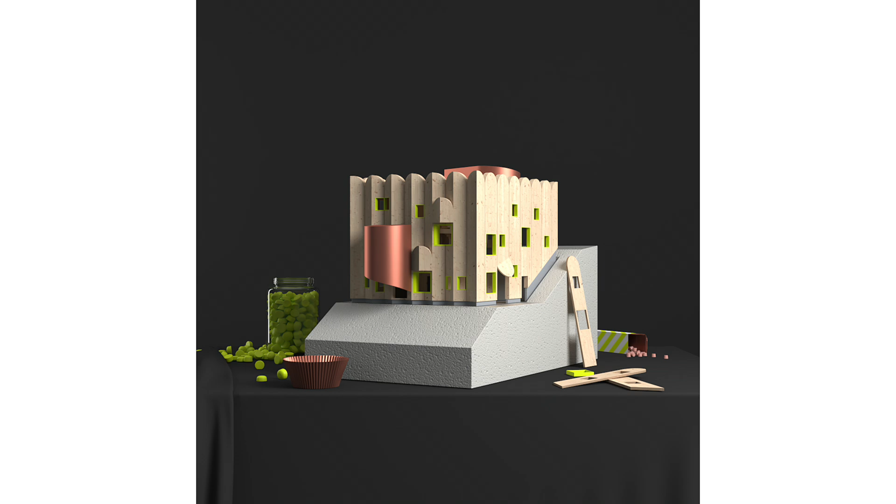So candy is a figural thing, but when we get to the final design it could just be the crinkle in the plan or the crinkle of the wrapper. The idea isn't to take the metaphor of candy and see it directly in the house, but to have some level of abstraction.

This image goes back to the work about still life that I showed from the Harvard exhibition and publication. The house is on a slope of more than 20%, in the city of Portland. It overlooks the Albina rail yard, but it also has candy inside.

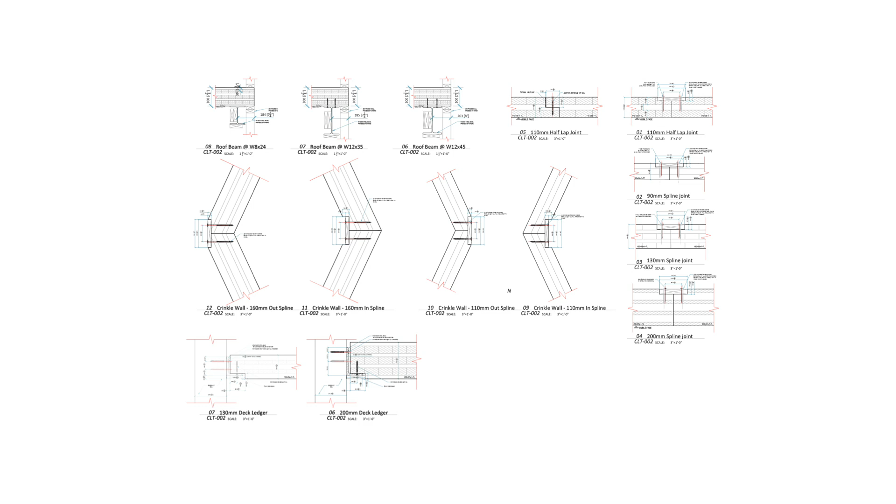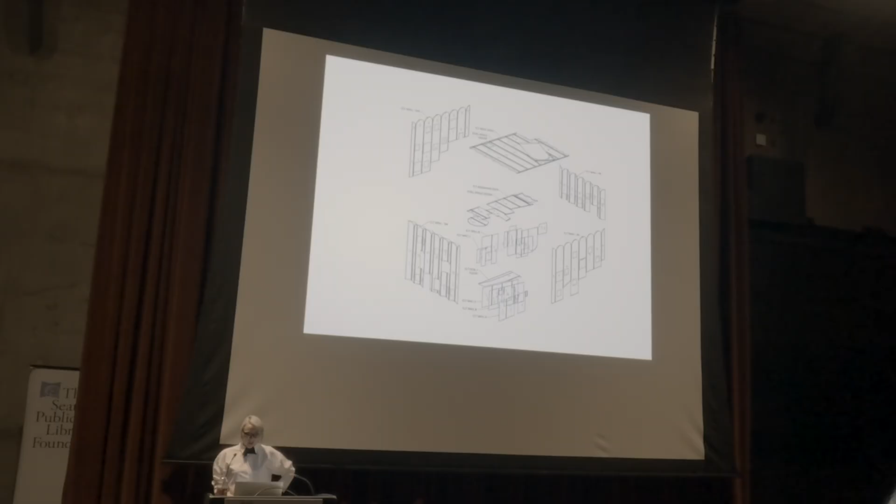It's really fun to me to flip from candy to the details of how to make these CLT panels come together—what you actually need to do to make these crenellated, crinkle facades—looking at how these 7 foot 4 inch blanks can make the perimeter of the project. It's a flat roof, and we think of them as distinct elements, with the windows cut out of them.

So you can see the logic—you can read the blank, right? On the interior we take the blanks off, again thinking about techniques of the still life and the domestic backdrop and setting.

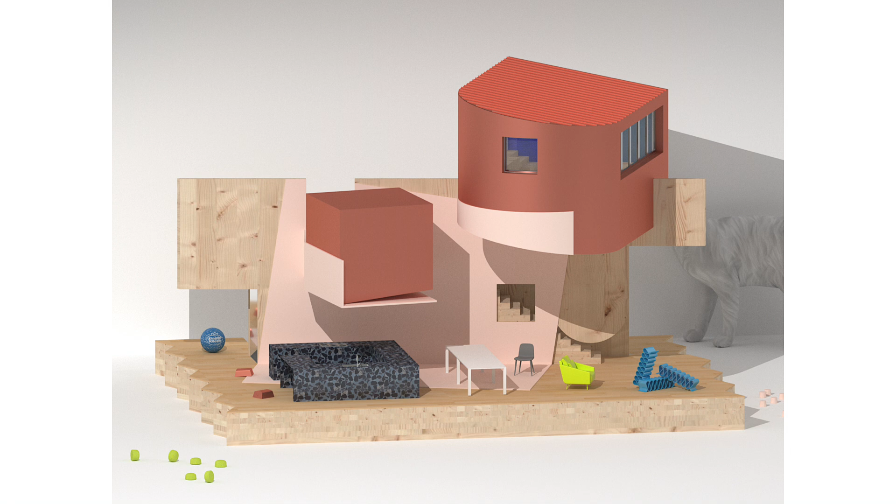The mundane, everyday kitchen duties or folding clothes look a little more exciting with these material backdrops that are both reflective and shiny, pink and stripy.

This is the lower floor plan—there are 3 beds on that level. You can see the candy cane stair coming down to the main level, where there are 3 big tables, though they're kind of hard to see in the plan.

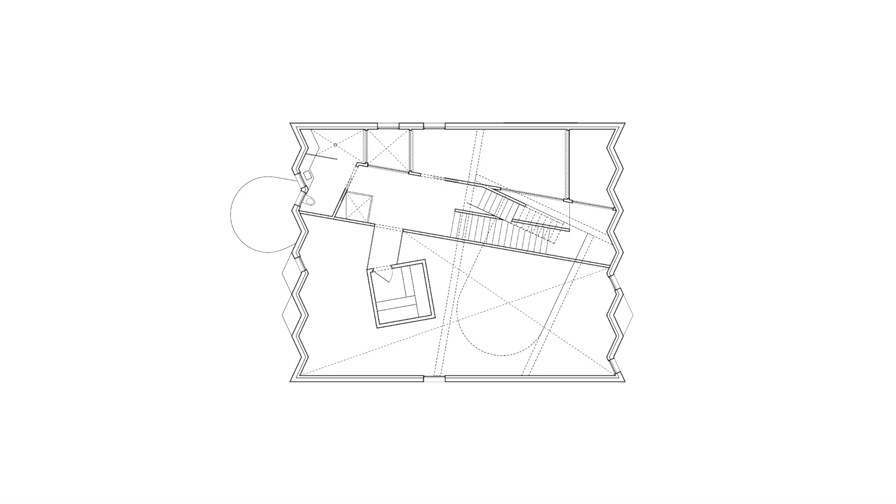You can see the crinkled facade, and obviously the candy cane jumps out. On the mezzanine level there are 3 leisure spaces. That's the programmatic stack in the Blank House.

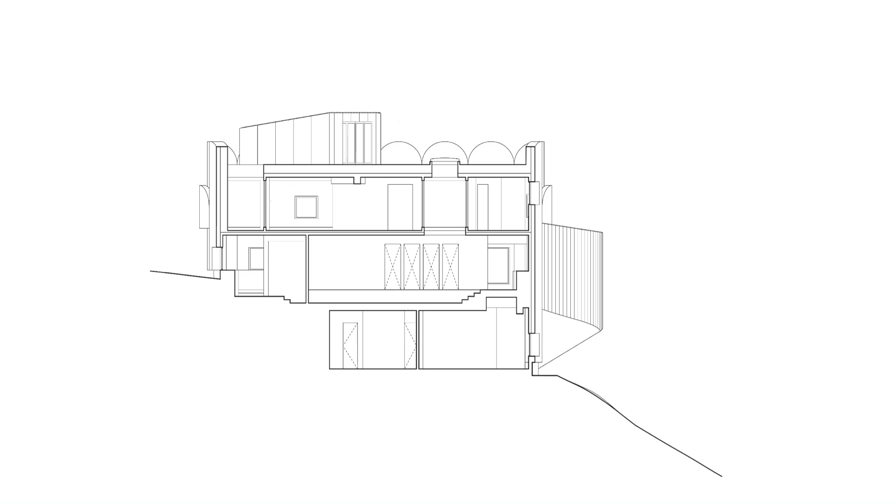This notion of candy being submerged or hanging from the CLT roof panels—in some cases you have double height space with objects floating, sometimes there's a 3-layer stack, and sometimes a double height space over a very narrow office space.

So in conclusion, I hope it's apparent that there are ways of using conceptual ideas from art practice in architecture, but also combining that with the technical rigor of a materiality like CLT. It's been super helpful to be able to do both, because until Haus Gables was built, I think if I gave this lecture none of you would have believed anything I said.

So I just want to inspire anyone who does not want to take a traditional path into architecture—there are many ways that you can make your architecture.

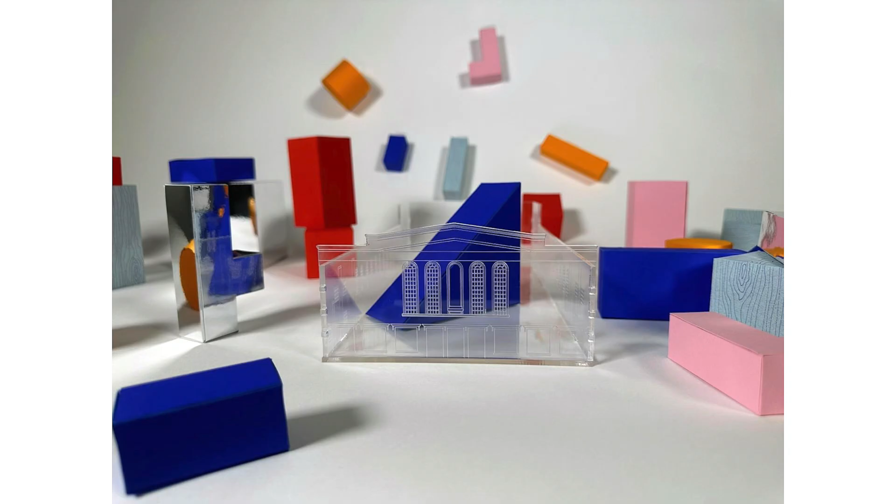Our client is a coalition of 8 nonprofits called Transform 1012. So just wanted to say, be on the lookout as we develop the Fred Rouse Center for Arts and Cultural Healing. Thank you very much.